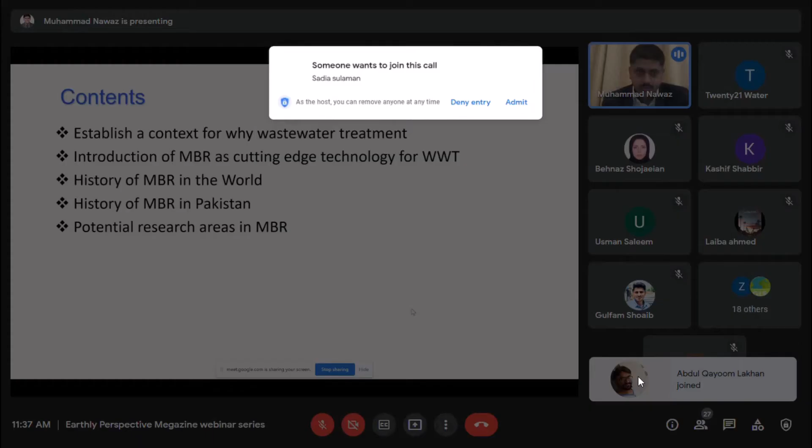Okay, let us start. So today our topic is membrane bioreactor for wastewater treatment and reuse. We will introduce MBR as a cutting edge technology for wastewater treatment, then the history of MBR in the world and in Pakistan, and potential research areas in MBR. I have considered this list of contents keeping in view that we have some youngsters and students attending this conference along with the experts. So for students, we need to tell them what the research areas are and what their future is in the market if they do research.

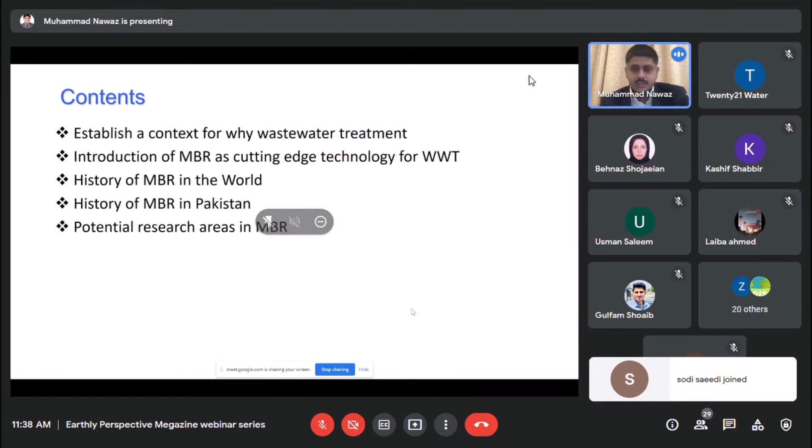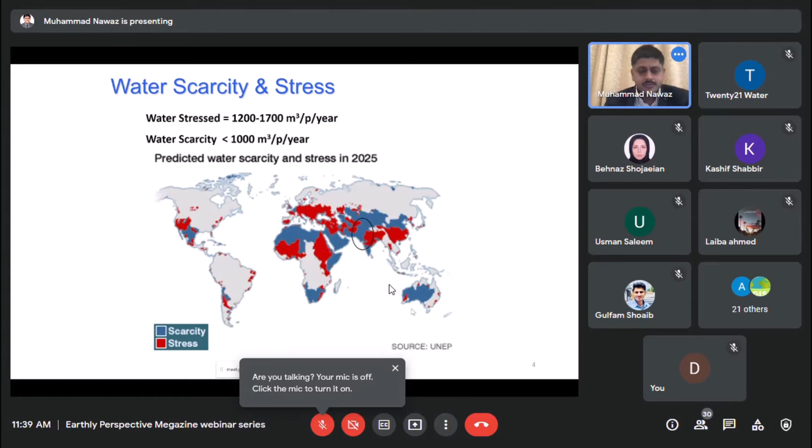We are already a water scarce nation. If a country has between 1200 to 1700 cubic meters of fresh water available per person per year, it is called a water stressed country. If this value is less than 1000 cubic meters per person per year, it is called a water scarce country. Up till now, we are already under the water scarce limit. That's a big problem for Pakistan, because one of the reasons is overpopulation. We are now the fifth largest populated country in the world.

A bit about water quality. What would be the problem if we use this type of contaminated water? For certain inorganic contaminants, like higher levels of aluminium in our drinking or potable water, it can cause neuropathological disorders. Similarly, arsenic can cause serious skin issues, and many other metals and heavy metals can cause different problems.

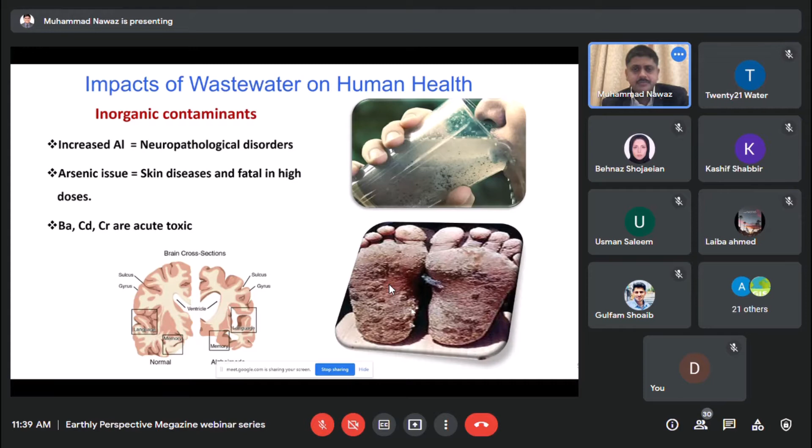Similarly, with organic contaminants, the biggest problem is that they give a nuisance to the water - they give color, taste, and odor. As a human being, you cannot consume water that has color, taste, or bad odor. So inorganic contaminants are latent; they generally don't give any color, taste, or odor, but organic contaminants do. They are also carcinogenic, and ultimately they become part of the food chain.

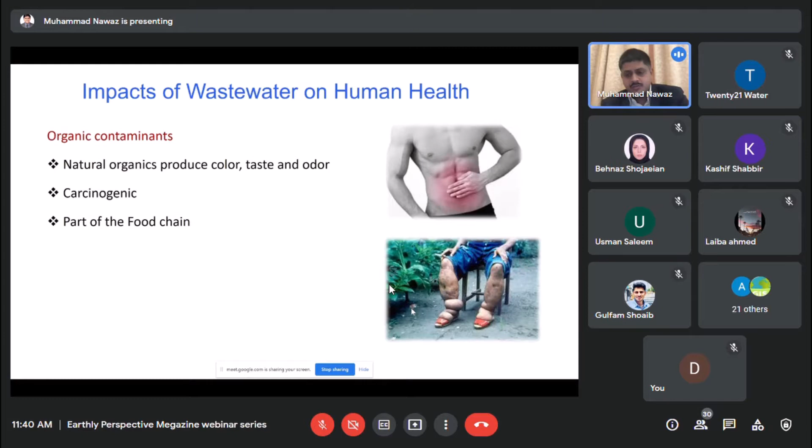Unfortunately, up till now we only have a city level wastewater treatment plant in Islamabad, and maybe now in Gilgit it is under preparation. Others are planned and designed, like for Lahore, where there are projects that have been designed, but not yet on ground.

Our national water policy of Pakistan was approved in April 2018, not very long ago. The national water policy states at least 4 to 5 different places that we should reuse treated sewage for domestic purposes, agriculture purposes, and industrial purposes. So it emphasizes more on the reuse of treated sewage. So how to treat that sewage? That's a question - how to treat that wastewater and reuse it?

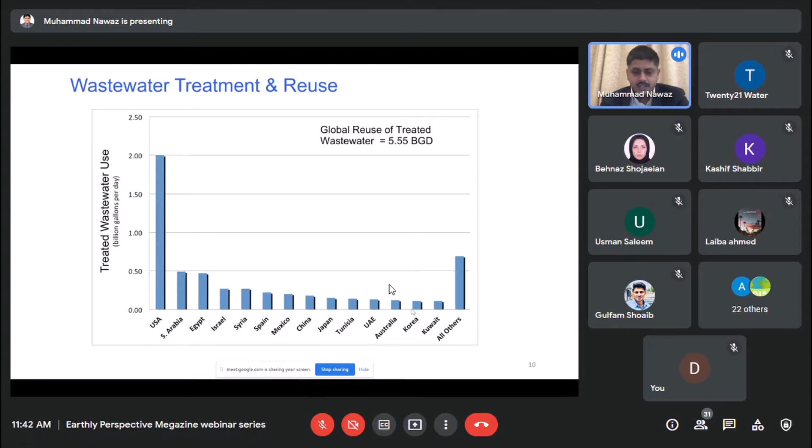What is the world doing? This is the treated wastewater reused, in billions of gallons per day. USA is reusing the most of its wastewater, about 2 billion gallons per day. Similarly, Saudi Arabia, Egypt, Israel, and other countries. So the global reuse of treated wastewater is about 5.5 billion gallons per day. If all other countries can treat and reuse, we should also think about treating and reusing.

Wastewater can be treated by physical ways, chemical ways, physicochemical ways, as well as biological ways. Up till now, biological treatment of wastewater is the most common methodology for wastewater treatment in the world. Till date, about 70% of treatment plants are based on biological treatment processes.

Reason number one, its operational cost is less compared to physical, physicochemical, or chemical processes. Secondly, the sludge which is generated as a byproduct of wastewater treatment—one is the product water which you reuse, and second is the sludge. So the sludge is stabilized; it is no more hazardous for the environment when you use biological treatment. That's why biological treatments are one of the most common treatment techniques used in the world.

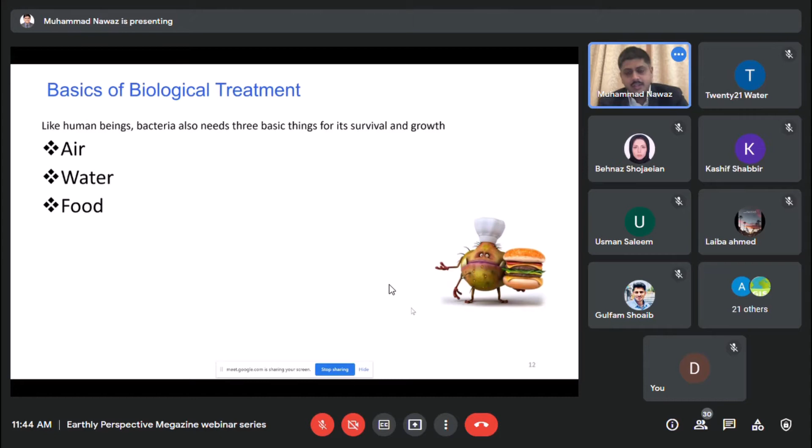What is the concept of biological treatment? We use bacteria here to serve our purpose, to treat the wastewater. Like human beings, bacteria also need three things: air, water, and food. If bacteria can get these three things, they can survive, they can grow, they can reproduce.

So air in biological treatment, mostly in aerobic treatment, we provide using mechanical blowers. Water is everywhere in the wastewater. And food are those contaminants, particularly the organics, which bacteria can utilize as their food, and bacteria can eat them as food and grow and reproduce and increase their number.

After, like I said, bacteria are also like human beings—ultimately they have to die. Every living thing has to die someday. So after spending their 5-7 day life, the typical aerobic bacteria dies, and it's no more harmful, like a dead man is no more harmful for anyone.

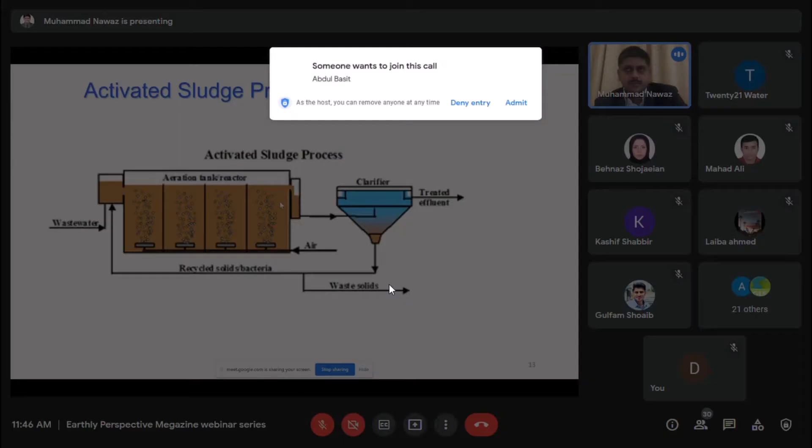Now, what was the problem with activated sludge? You will think, when I say bacteria can grow here in the aeration tank, if for example we have 2000 milligram per liter concentration of bacteria in the tank, they can, let's suppose, consume the COD in the wastewater in 5 hours. If we double the concentration of bacteria in the aeration tank from 2000 to 4000, then they will take less time, maybe 3 hours, to consume the same amount of COD in the wastewater, because now there are more bacteria to consume the same amount of COD.

So what ultimately will we want? We will want something like unlimited concentration of bacteria in the aeration tank. We may want 10,000 milligram per liter, okay?

But what would be the problem? The more bacteria we have in the aeration tank, we call it MLSS, mixed liquor suspended solids. So higher the MLSS concentration in the aeration tank, bigger will be the problem for their settling in the clarifier. The clarifier will start getting more solids, and this brown color which is settled just at the bottom may come up to the top. And even in the treated effluent, you will start finding the suspended solids or sludge particles or the dead bacteria. So that's the problem.

Due to that limitation, we cannot go above generally, typically, 2500 to 4000 milligram per liter of MLSS concentration, mixed liquor suspended solid concentration, in the aeration tank.

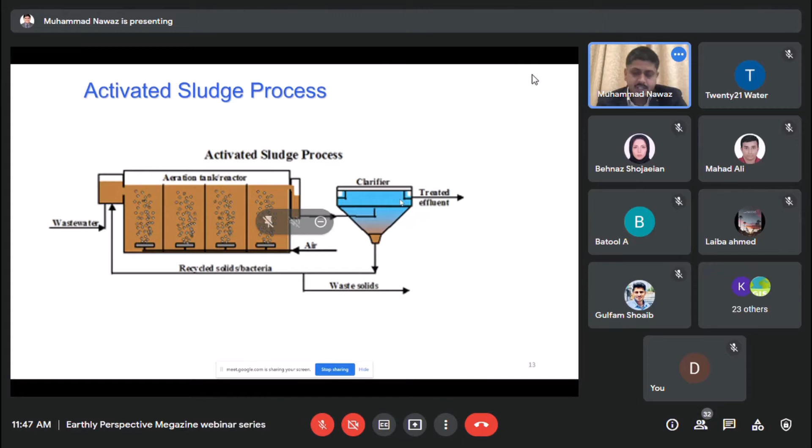There are different types of bacteria: stragglers, good settling, pin floc.

We cannot have a monoculture in the aeration tank. It could be a mixture of 10 different bacterial species, or it could be a mixture of 100 different bacterial species. Definitely there are some dominant species which are more available, or their percentage is higher in the mixed activated sludge, and some are lesser.

But we want good settling bacteria so that they can settle in the clarifier later. And if we increase the concentration of bacteria, we see here F over M ratio in the middle. F means food, M means microorganism concentration. So if your food is less and microorganisms are high, F divided by M would be a very low value, and you will see here nematodes, ciliates, pin floc.

These are not good settlers. They will in any way go outside the clarifier untreated and increase the TSS of your effluent. So that is why we need some solution which is free from settling type of issues.

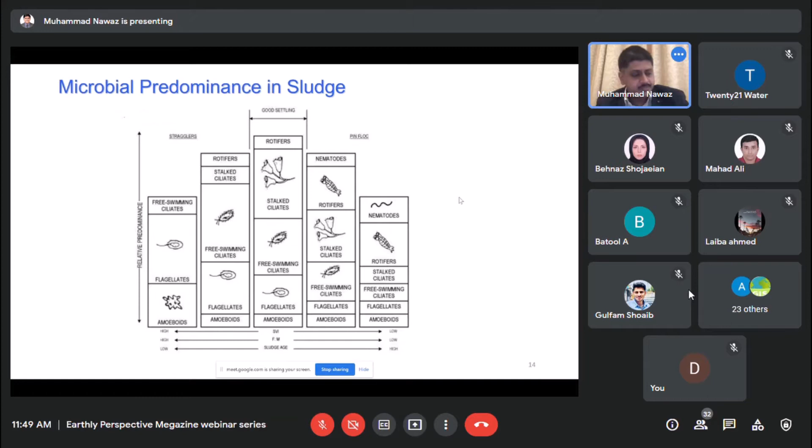MBR. Now we come to our topic, membrane bioreactor. So MBR removes these kind of problems. We see here two trains: one is conventional activated sludge and below is membrane bioreactor. In conventional activated sludge, we have wastewater coming to the primary sedimentation tank, flotation tank, aeration tank, disinfection, and then clean water supply. So all these four tanks are combined in a single tank in membrane bioreactor, as shown in the left bottom figure.

This is the aeration tank like I showed you in the activated sludge process. Aeration is provided with the help of diffusers and aeration blowers. So aeration serves two purposes: one, it provides oxygen for the bacteria to survive, and second, it keeps the sludge in suspension, mixing it so that there is no short circuiting.

Every drop of wastewater which comes inside the MBR will get some type of treatment at least. It will be mixed with the bacteria. So aeration serves these two purposes here.

And there is an anoxic chamber as well, which is optional. In some MBR we provide anoxic mixing with the help of a mixer, no aeration is provided. And in some MBR we don't provide anoxic mixing. But generally, nowadays, people do provide anoxic mixing.

And then you see the membranes, these blue color tubular membranes. You can see the pores on the membrane surface. So the pores are so small that only water molecules can get inside the membranes, and all the sludge particles and suspended particles are removed or stopped by the membrane, mostly due to a size exclusion process.

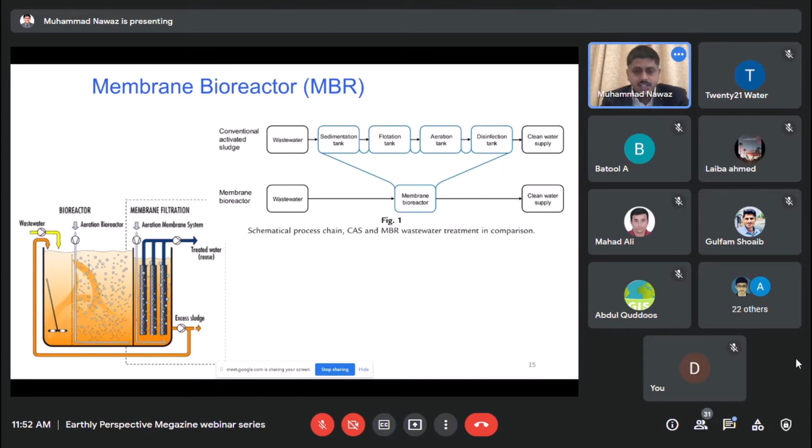Now we are free from the settling problems. What are the advantages of MBR? You can see in the bottom right, there is a beaker with water. It's the treated wastewater ready for reuse from an MBR plant that was installed by us.

Less time is required for treatment, as I showed you, because we can maintain a very high concentration of MLSS or bacteria in the aeration tank. So we need lesser time, and when we need lesser time, it means we need a smaller tank. If we have, for example, the same volume of wastewater, 100 meter cube, to be treated through the activated sludge process and the same amount through the MBR process, we need a smaller aeration tank in MBR. So smaller tanks mean less space requirement.

Excellent treated effluent quality, no doubt. Treated effluent is, if I don't tell you that it is treated wastewater, you will consider it like tap water.

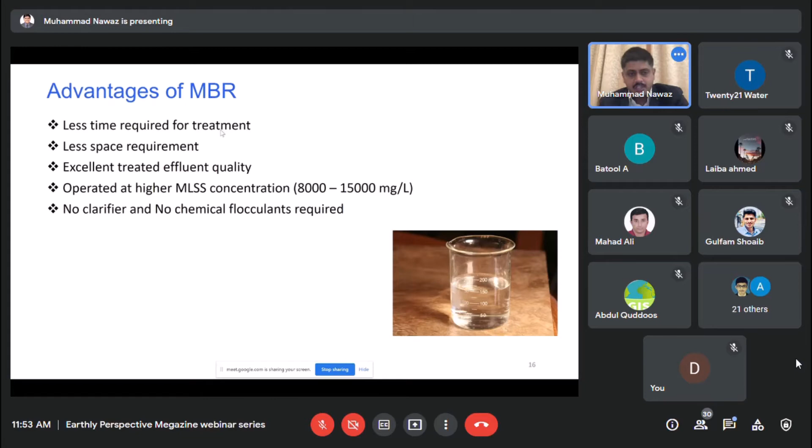And it can be operated at very high MLSS concentration with no need of a clarifier or flocculants required. But there are also some disadvantages of MBR on which research is going on to solve the problems.

High automation requirement because it involves membranes. Membranes require maintenance as well as automation software. You need to know at what time to apply suction pressure on the membrane so that you can get water flux through them. Membranes also need backwash, and occasionally they need chemical cleaning. So of course you need a high automation requirement for the membranes.

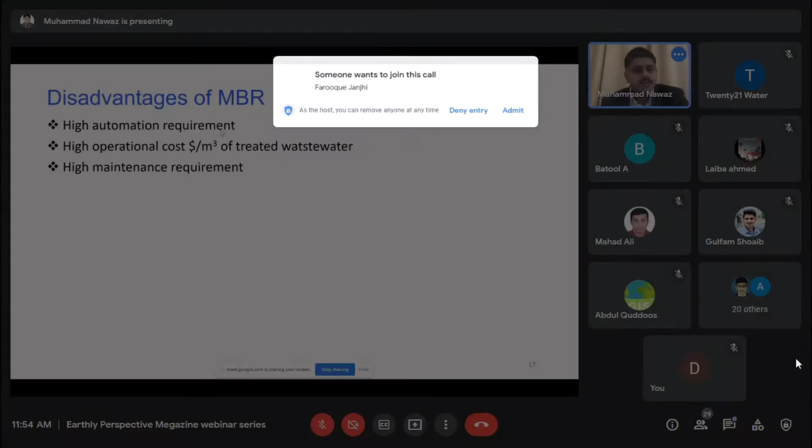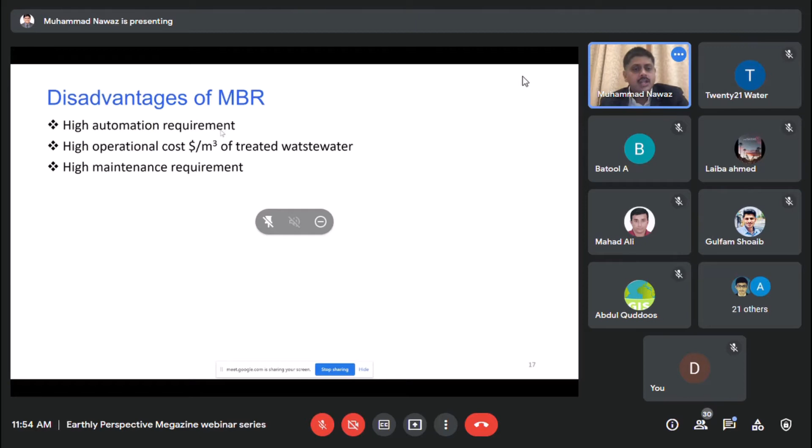And yes, higher operational cost, which we call specific energy requirement, which I will show you exact values for in the next slides - dollars per cubic meter of treated wastewater compared to conventional activated sludge process. And of course, high maintenance requirement.

Now we talk about the integral part of MBR, which is what type of membranes are used in the MBR. There are four types of membranes: MF meaning microfiltration, UF meaning ultrafiltration, nanofiltration, and reverse osmosis.

Microfiltration membranes have pore size in micrometers, generally 0.1 micrometer. Ultrafiltration has 0.01 micrometers. Nanofiltration goes to 0.001 micrometer, or 1 nanometer size pores. And reverse osmosis goes to angstrom, or 0.1 nanometer pores.

You can see they have tried to show the pore size with the help of patterns which are getting smaller and smaller as we move from MF, UF, NF, and RO. So basically the membranes work mostly on the physical phenomena of size exclusion, but the membranes are also made for specific jobs, so they can serve as physical as well as physicochemical phenomena.

Sometimes a membrane has active layers coated on the membrane surface to remove certain typical contaminants. For example, if you want to remove iron with the help of a membrane, and you have a very high iron dose, you can do specific coatings. They will generate active groups on the membrane surface which can capture iron. But most of the time membranes work through physical phenomena and just the size exclusion principle.

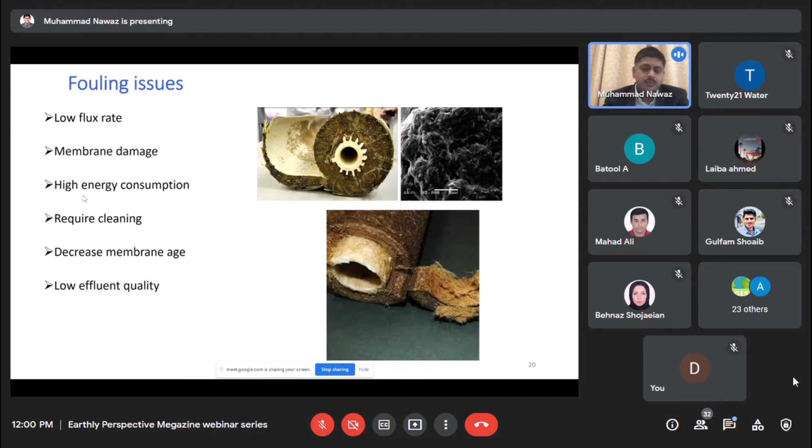So for getting the same flux, you need a higher energy consumption, and the membrane requires cleaning. And the more you clean it chemically, the more it reduces the membrane life. Like if we start washing our clothes again and again every day with surfactants, of course, those clothes' life will decrease. And in some cases, if you have severe fouling of the membrane, it can reduce the effluent quality. You will not get effluent like I showed you on the photo.

So how to operate an MBR? There are generally two ways MBRs are operated. One is called constant TMP mode, and one is called constant flux mode. TMP is transmembrane pressure, meaning how much pressure we apply on the membrane to get a flux. For example, I say that I want to apply a pressure of 50 kilopascal on the membrane, and I will keep it constant. Like you see in the left graph, the TMP line is constant. So what will happen? Flux will continuously reduce, as we discussed in the previous slides, because of fouling. Initially you can get a higher flux, and with the passage of time, the flux will eventually reduce.

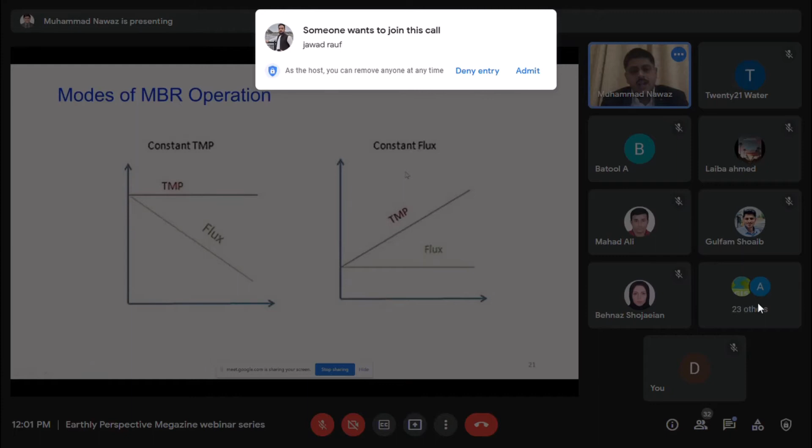So the second type of operation is constant flux. You say, okay, I will keep on increasing the transmembrane pressure, but I want a constant flux through the membrane, for example, 10 LMH, 10 liters per meter square per hour. So in that case, you will get a constant flux, but with fouling membranes, you need to constantly increase the transmembrane pressure. Membrane manufacturers always give you an extreme value up to which your membranes can be operated. And after you reach that value, you have to stop the operation and do backwash or chemical cleaning.

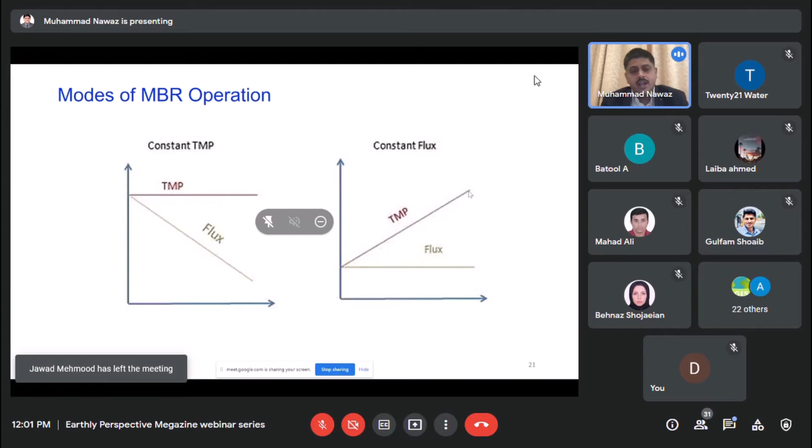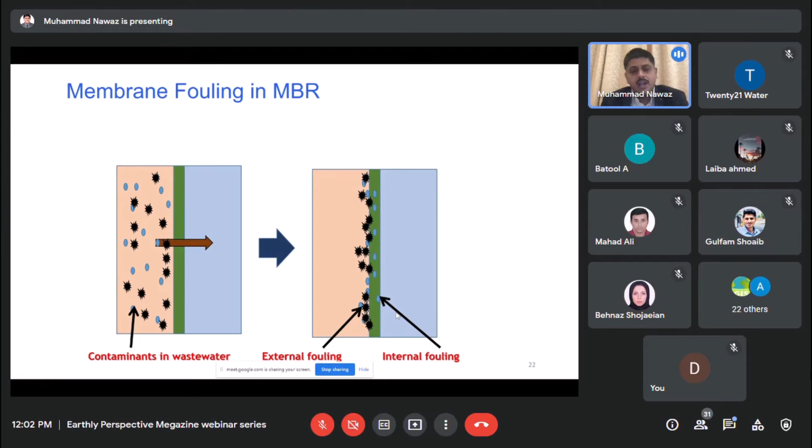As we discussed in previous slides, consider these are the contaminants. This green is the membrane of a membrane bioreactor. You will see most of the contaminants are stopped on the membrane surface, which is called external fouling. And some contaminants, due to their smaller size or shapes, can enter the membrane pores and cause internal fouling.

So one way to remove fouling is backwash. You apply a pressurized water flux. Initially, water was going from left to right. Now you apply treated water from right to left. So all the layer which was on the membrane surface would be dislodged and start flowing again, and you can waste this water. But backwash cannot remove internal fouling. Internal fouling is still there. It can only remove the external fouling, the surface fouling or the layer formations.

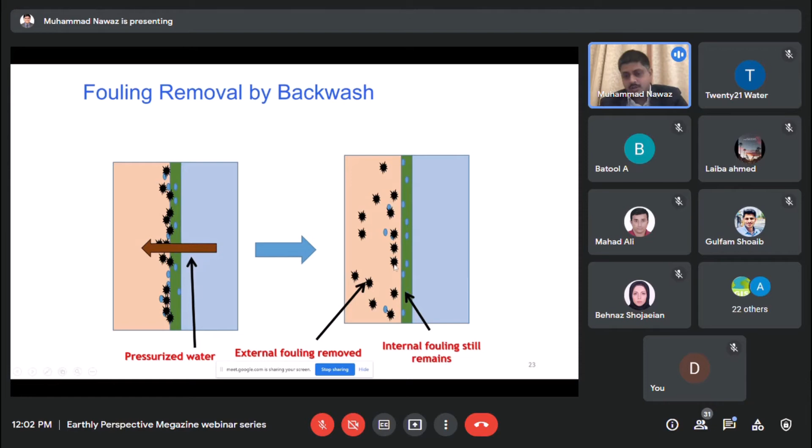There are some other methods to remove fouling. One is called relaxation and one is called scouring. What is meant by relaxation? You see here filtration for 7 minutes. It means that your MBR is operational for 7 minutes, and then relaxation for 1 minute. For 1 minute, you have automated your system so that all the pumps which were creating suction pressure inside the membrane loop are stopped. So your membrane pores would be relaxed.

Once a thing is under pressure, more contaminants stick to it. And once you relax it, the contaminants will fall down. So that's the concept of relaxation: for a certain time period, the membrane is under operation, and then for a certain time period, you stop the operation. It's very simple, and it is well practiced in most MBRs.

And the second thing is scouring. They have shown you a membrane lumen inside a membrane. Consider these brown foulants which were trying to enter the membrane, and now they are on the membrane surface. Then you provide membrane scouring. Scouring is done either by airflow or by physically moving the membrane. As I said, we are doing aeration in the aeration tank of the MBR, so that air can dislodge these foulants from the membrane surface.

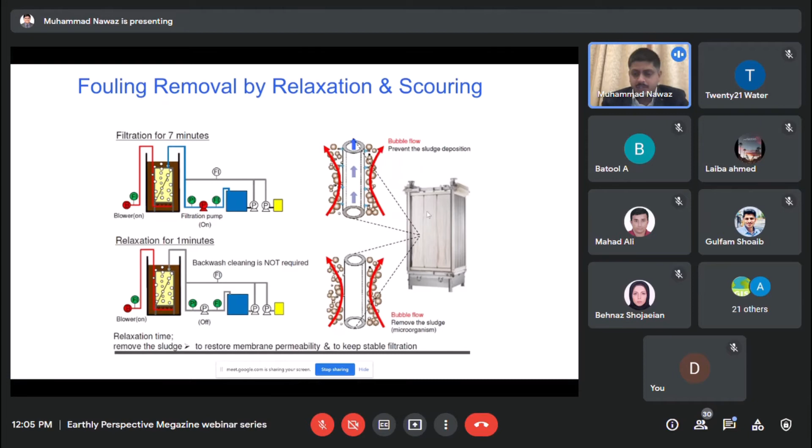And you can see in this figure that these membrane lumens are flexible. They can move a bit. They are designed for this purpose, so that when they shake, the layer can fall down. So all these fouling removal methods, backwash, relaxation, and scouring, are mostly for the surface layer formation. But for internal fouling, we have to go for chemical cleaning.

What we do, we take the membrane and immerse it in a chemical solution for some time, and then internal foulants can be removed through the diffusion process. But the demerit of this is you have to maybe shut off your plant for 8 to 10 hours, or you can do it in side stream configuration as well. But this is something which you do only maybe once a month or once in 2 months. So chemical cleaning is not that frequent like backwashing or relaxation or other ways.

Okay, so after giving you an idea about what MBR is, what type of treated effluent it can generate, now we go to MBR history in the world, how MBRs were developed. So they are very old in the market. From 1960 to 1970, first MBRs were developed using ultrafiltration membranes and activated sludge process in a side stream configuration. Submerged is in which the membrane is submerged inside the aeration tank, and side stream means the membrane is not physically submerged in the aeration tank, but you circulate the sludge, and there is a separate membrane tank where the sludge gets filtered and comes back. So these two types of configurations are used in MBR.

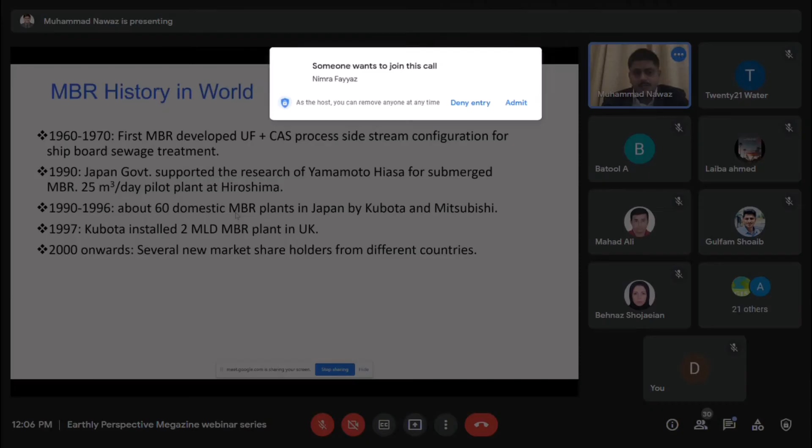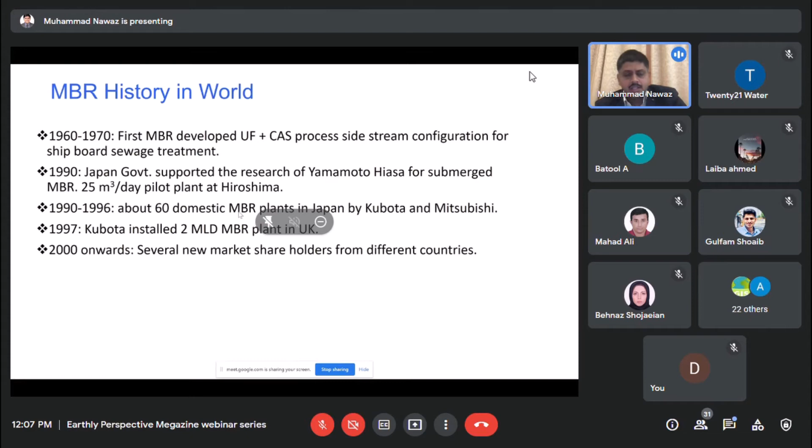So you can see the Japan government basically spent more money in the R&D, and some professors were initially in favor of submerged MBRs, and they installed very small pilot plants of 25 cubic meters per day at Hiroshima. And then some big companies like Kubota and Mitsubishi jumped in. That is a very important point, which we will also discuss at the end of the presentation. When these companies jumped in, they started extensive R&D on MBRs, and then they installed several treatment plants all over the world.

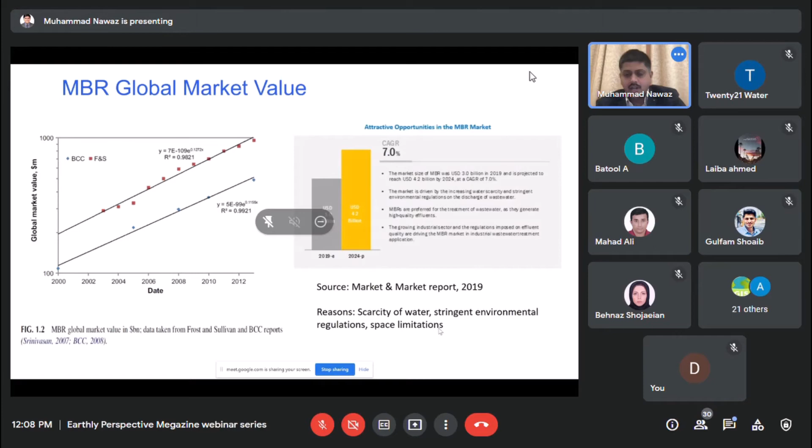Role of R&D in increasing the acceptability. The first question which comes to the mind of students specifically and also professionals is, if MBR is a very good technique, why is it not well accepted so far in Pakistan and in most parts of the world? So one thing was, of course, its operational cost, which we will discuss in the next slide as well. You will see the number of installations of MBR has substantially increased from 2000 to 2011. For example, very big plants are also installed and small plants, and in total you can see maybe hundreds of plants in a single calendar year.

And here I have added the number of research papers on MBR in different areas like MBR fouling, membrane cleaning, clogging, hollow fiber membrane, flat sheet membrane, hybrid processes combining MBR with other processes, and micropollutants removal. They kept on increasing. When R&D increases, it fills the research gaps, and the industry, which I showed you in the previous slides, can make decisions and make new products. There could be patents which they can convert into products, and that results in increased acceptability of MBR in the world.

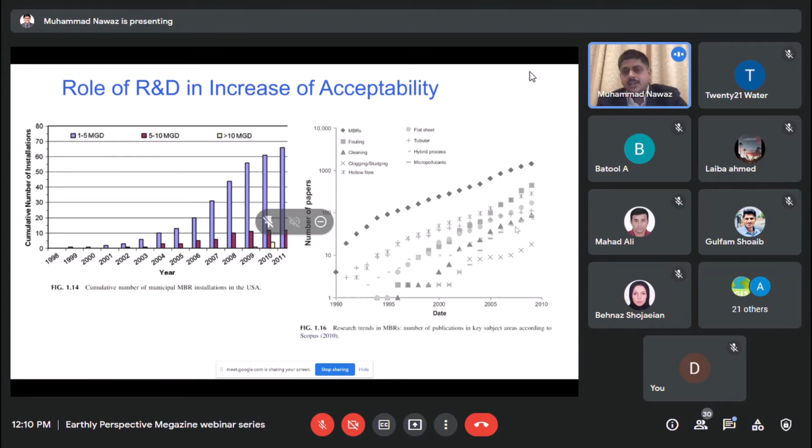So, energy consumption in MBR.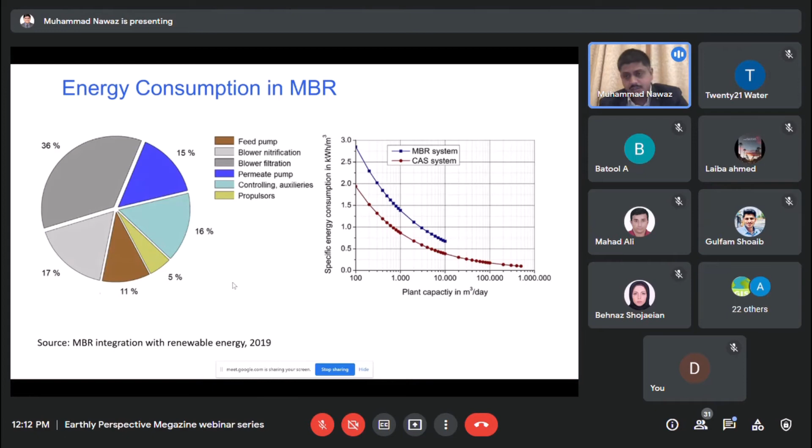So this pie chart shows you what takes most of the energy in the MBR. There are the feed pumps, the blowers, which are used for aeration and nitrification, and then you have permeate pumps, and then you have automation and everything. So most of the energy is taken by the blower. If you see 36% plus 17%, 53%, more than half of the energy is just taken up by the blower. So that's one of the research areas where we can do something, and we will discuss it.

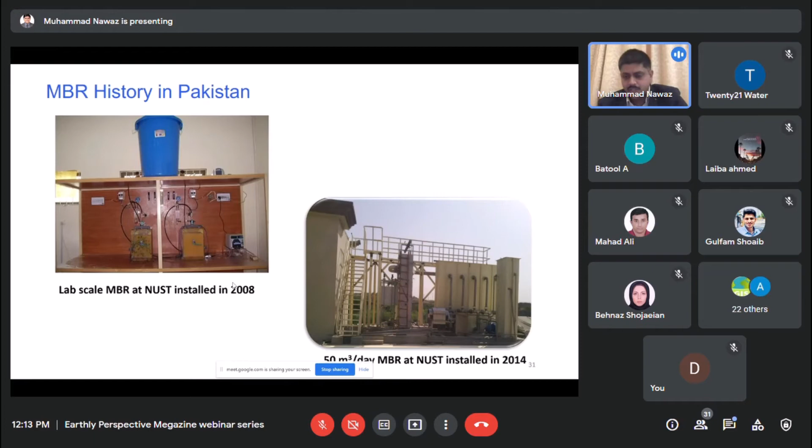MBR history in Pakistan. The first lab scale MBR was installed at NUST by Professor Sher Jamal Khan when he returned after his PhD. And with the help of research for 6 years, they were able to go up to a 50 meter cube per day MBR installation at NUST in 2014. That MBR is an R&D based MBR treating the domestic sewage generated by some apartments, which is a very partial flow of NUST. But with this MBR, you can do R&D, you can turn off and turn on different unit operations and processes and do your research.

So research areas in MBR, this part is specifically for the students. After looking at the last few slides, you will think, okay, which areas can I really work on for my research? There could be many areas like wastewater to be treated, membrane characteristics, attached growth material, microbial properties, optimization, and anaerobic MBRs. We will discuss all of them one by one.

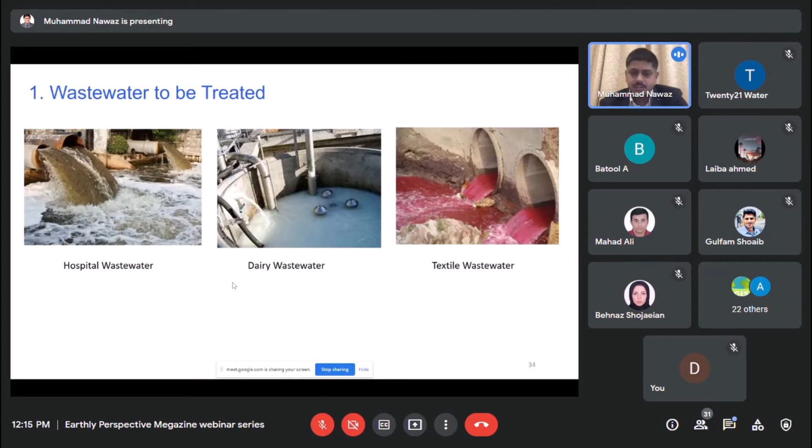Wastewater to be treated. MBRs have been proven effective for most wastewater types, like hospital, dairy, textile, but still there could be some wastewater streams which have not so far been attempted by researchers, or someone attempted it but was not successful and could not identify why. So in Pakistan, luckily we have roughly all types of industries, and if you do a good literature review, you can always find what kinds of wastewaters have not really been attempted and what we can do in our research.

Membrane manufacturing is also one of the areas. I know some universities in Pakistan have the capabilities to develop membranes. The countries which are very good in membrane development research are China, South Korea, Japan, because all the big companies I showed you are based in those countries. Singapore does more research on membrane development. Pakistan generally does very little research on membrane development, but that can also be an area for chemical engineers or material engineers.

Attached growth material you see here in the MBRs. These plastic media are moving around. They are called attached growth material. One option is that your MLSS or bacteria hang around in the tank, like in these two tanks, without any support. And one idea is to give some support, some plastic media or any other media. People have used different types of media, from styrofoam to this kind of media.

The bacteria attach to the media surface, and the inner surface of this sludge layer is anoxic in nature because air is not reaching the bacteria in the dead zones. So when you have this kind of media in your MBR aeration tank, it can give you aerobic treatment and also anoxic treatment, because those bacteria are in an anoxic mode, and they can do a bit of treatment for nitrogen and phosphorus removal. So you can try other types of media as well.

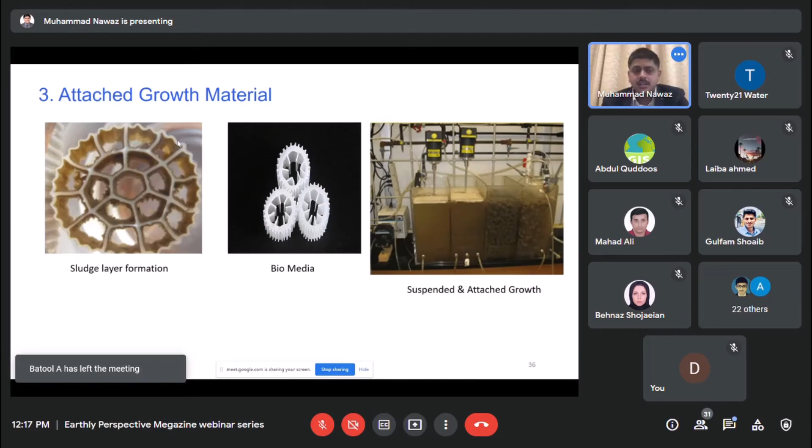Type of bacteria. We found in our research that generally the dominant species of bacteria in the MBRs are E. coli, Pseudomonas aeruginosa, Nitrosomonas, and people also tried to have monoculture MBRs in which they targeted to remove certain specific contaminants from their wastewater. And for that, they find that this kind of bacterial species is more effective, so we don't want to grow the other species. So they went with monoculture MBRs as well. Although their operational difficulties are a challenge, that is also a solution.

And then you see a small word I wrote here, quorum quenching or quorum sensing. These are also latest technologies in which, because these bacterial exudates, or their excreta, is the main thing which is used as a gum to stick all the contaminants on the membrane surface. So now people are trying that these bacteria don't interact with other bacteria, and then they don't release that much exudates, which is used as a gum for contaminants. So that process is called quorum quenching, and it is now the research in the town.

Optimization of processes. Although for MBR, processes are well optimized, what kind of filtration mode you use, what you should do, and how frequently you should do backwash. But as going to option number one, if you have a brand new stream of wastewater, probably you have margin to do some optimization of process studies.

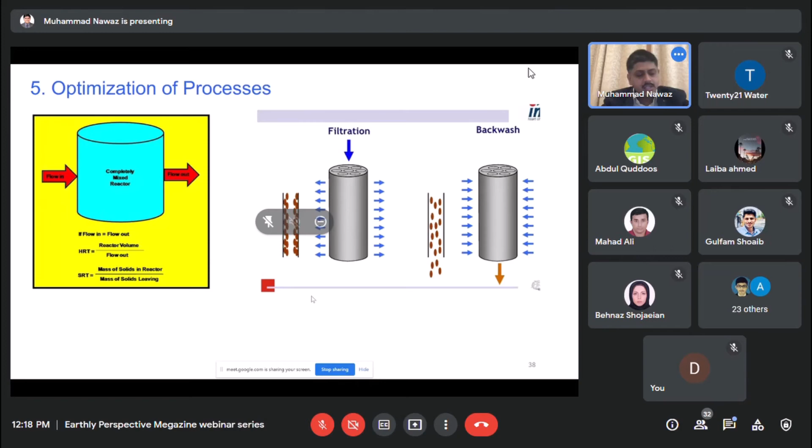And then anaerobic MBRs and gravity-driven MBRs. There are also MBRs which have no aeration. As we saw, 53% of the energy of MBR was used in aeration. So if I don't want to do aeration, I can use it as an anaerobic MBR process. Of course, it will have lesser energy requirement, but also its effluent quality would not be very good, and it would generate far less sludge compared to aerobic MBR.

And then there are gravity-driven MBRs, in which the membranes are submerged inside the tank, and gravity is used, because these ultrafiltration membranes operate around 1 or 2 bar pressure. So if your gravity tank is very tall, it can generate a hydraulic pressure of 1 to 2 bars. So your membranes can get infiltration, and you can get effluent. So these are also one area of research.

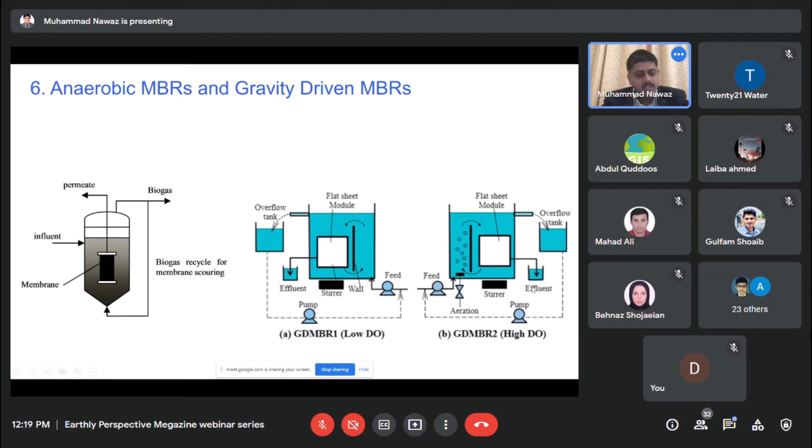So now a case study of membrane bioreactor at Pakistan Kidney and Liver Institute, Lahore. This MBR was designed and installed when I was working in my last job as Manager Environment and Public Health Engineering at Infrastructure Development Authority, Punjab. So PKLI is a flagship project of the last Punjab government, to be exact. Before that, people were going for kidney and liver transplant to India or to America. Going to America was expensive, and going to India was difficult due to visa processing issues. So this is really a gift for those people who can find a donor for kidney or liver transplant.

So it's a big facility, and it is already partially completed and partially under operation. It has 800 beds in DHA Phase 6, Lahore, and it will be extendable to 1500 beds with 100 ICUs and several OPD departments. So we estimated the wastewater of this facility to be 1600 cubic meters per day, and the MBR was selected as the treatment technology for several reasons, because it's a state-of-the-art project of Pakistan, so it should also have a state-of-the-art wastewater treatment plant.

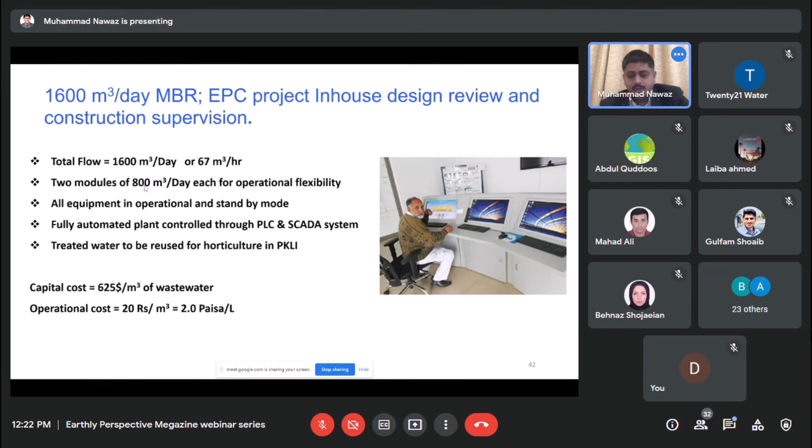So the total flow of 1600 cubic meters per day, we divided into two modules of 800 cubic meters per day each. The reason is that when you have a hospital or a housing society or anything which you cannot foresee would be completed or fully operational in 1-2 years, it is always wise to install your plant in different trains. So if it is partially operational and you are getting a partial wastewater flow, you can run one train. When your flow is full, you can run the second train. It is fully operated through a SCADA system and well designed.

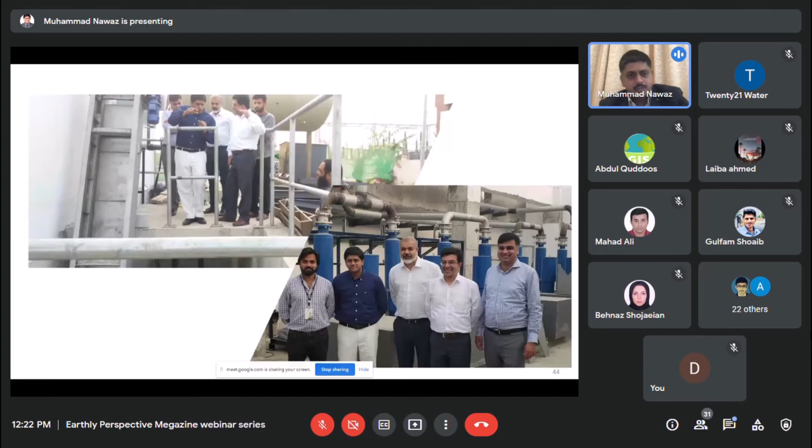That's its 3D model. It has a belt filter press for sludge dewatering as well. And that's me and Professor Shehjamal and some experts when it was under installation at the site. So effluent characteristics: the treated water from this MBR would be used for horticulture requirements of PKLI, Pakistan Kidney and Liver Institute, and the characteristics are selected as per US EPA requirements for horticulture reuse.

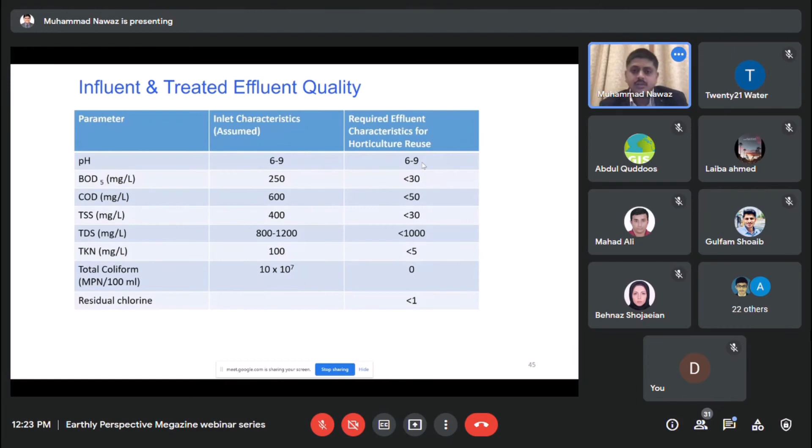Whenever you serve as an environmental engineer, you should know operation and maintenance is an integral part of any project's success, particularly for government projects. We see many failed projects, I don't want to name them, because they don't consider operation and maintenance. They think they can handle these things themselves once the contractor installs them. But in many cases they don't have the expertise, and these plants, being mechanical and electrical, need maintenance. So for project success, you need good operation and maintenance, and you can sublet it to the same contractor or some other consultant or company which can run your plant.